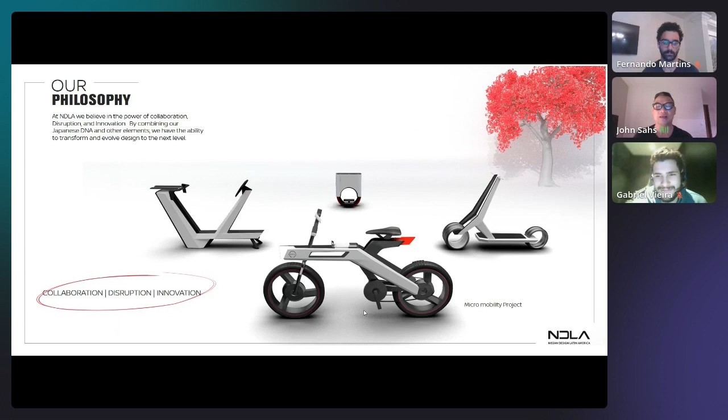And we felt it would be a great opportunity to take some of our electric battery technology and apply it into this micromobility solution where you can exchange the batteries between your bike, I think you call it the kickboard, your unicycle mobility, and also your training cycle in your house to share the same battery unit. So we had this idea trying to create an ecosystem that really evolves on electricity and sustainability. Next.

So I'm going to hand it over to Fernando to talk about this small project we did using Gravity Sketch. And I think why we really believe in this product is because during the pandemic situation in 2020, my team and I were separated because of the quarantine. So we had to use the current communication tools to communicate our meetings together, but it lacked that kind of, I would say, intrinsic connection that we have when we're working together in the studio.

And so when a few months ago, Gravity Sketch had reached out to us to try out the software, I was blown away and my team was blown away because the software allows you to simulate that intrinsic connection you have while working in the studio, meaning that we can be in this metaverse world, use Gravity Sketch to do our designs and do evaluation in real time and make the modifications in real time, which we don't have in, say, the current communication platforms we use to do meetings. Those are lacking that intrinsic value of being connected.

So Gravity Sketch definitely allowed us to be able to do this particular small project and have fun at the same time, really simulating the real world situation of working in the studio. So I'll leave it up to you, Fernando, to talk about this project that we did within, I would say, around 3 to 5 days.

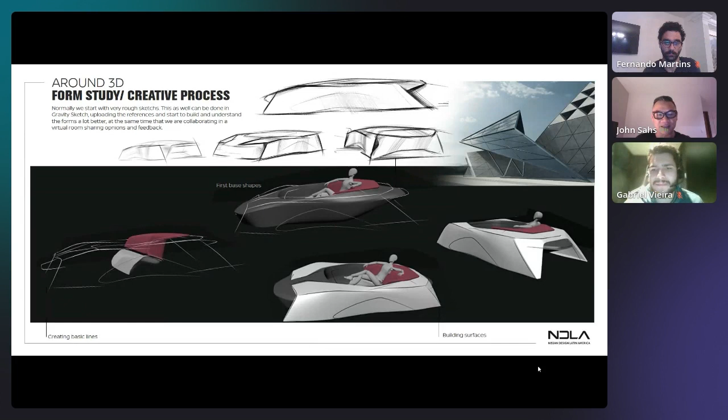So here's a project just showing Fernando's process of what he did. And can you go to the next slide, Fernando? Thank you. And this is the result.

So basically, from those initial ideas, he created the initial curves in Gravity Sketch, created the initial surfaces to capture his theme, and then put it in a kind of format to present the idea as a final solution or final presentation of this particular sculpture that he created.

Of course, he also used other tools to help render some areas of the form and doing some studies. And that's what I think is great about Gravity Sketch, that you can use other tools for presentation. For example, if you have to use some type of rendering software, it's very intuitive, very interactive with other tools.

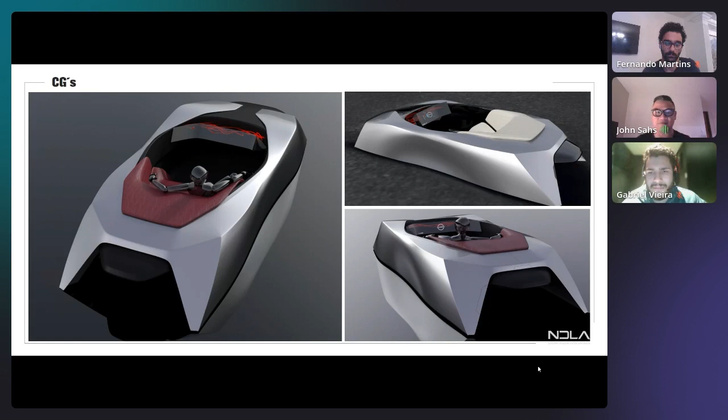This I find very interesting. Gravity Sketch has this kind of seamless integration that you can work with other tools in developing your ideas.

Here is kind of a quick study, again, with color materials, playing with colors and graphics. Something that we do normally in our industry when we create a car, we do variations of colors because color and materials are quite important in the process of designing a car.

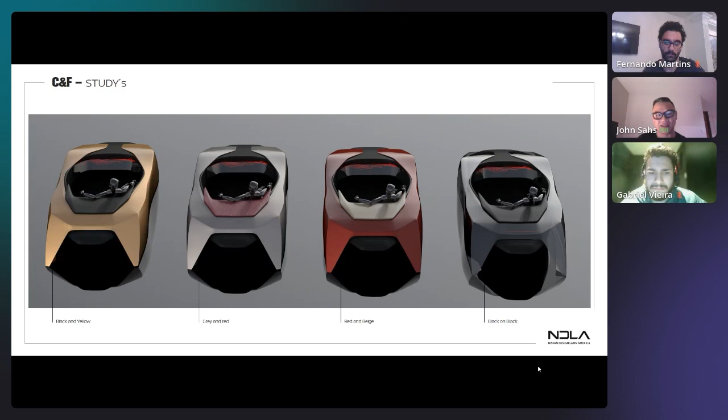So here we show you some solutions that we felt were kind of cool, and even the shape and the metallic finish going against the matte black gives this very cool and futuristic feel. Next. A little video just to show you the process, and I hope you enjoy it. Again, collaboration, disruption, and innovation are the three pillars that we work with at NDLA.

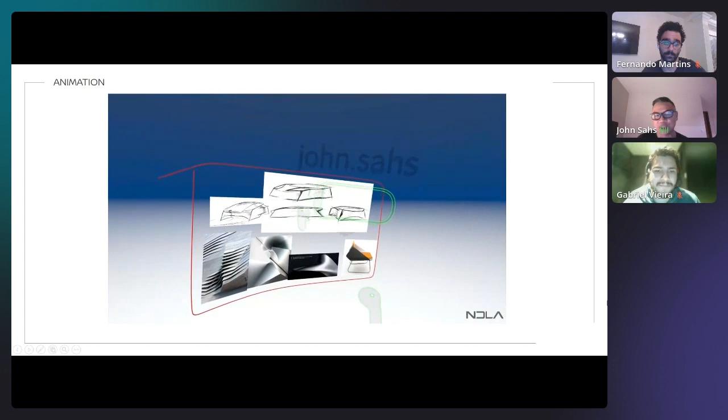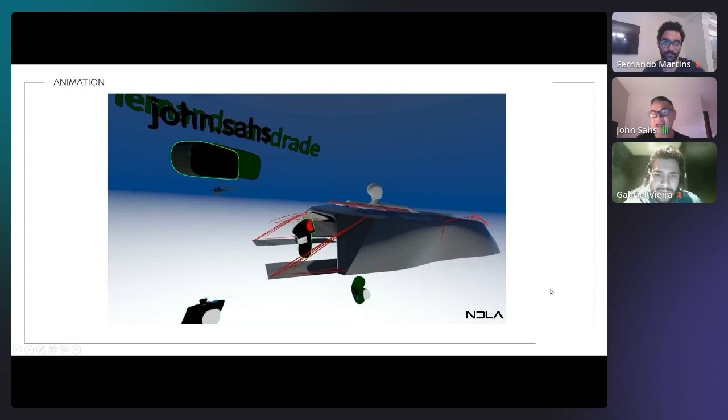And as you can see, Fernando creates the wall of his sketches, has some inspiration images, and we are there within this metaverse room, working in real time, refining the ideas together. This is something you can't get with any other software, working together in real time, and being able to develop the ideas quickly.

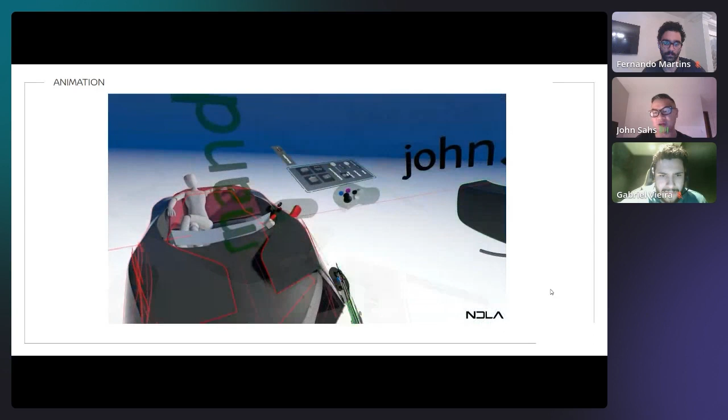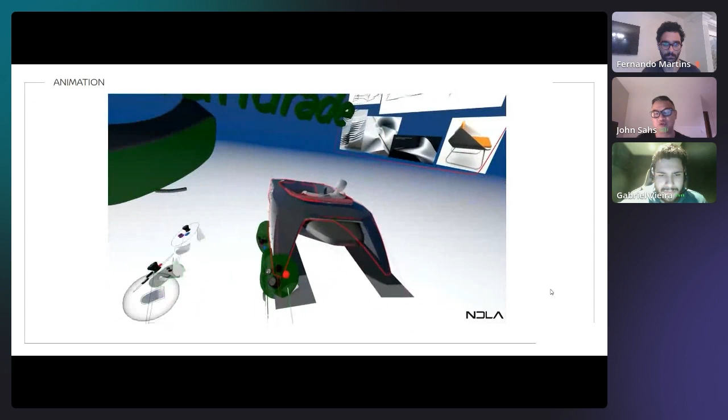Another thing I think about Gravity Sketch is how fast you can create your ideas and how fast you can make variations. This is a game changer, I feel, in the industry of design, where normally doing a lot of variation takes a lot of time. In Gravity Sketch, it's almost instant. And it was great collaborating on this quick project. And you can use a lot of the images from Gravity Sketch for presentation, as you see here.

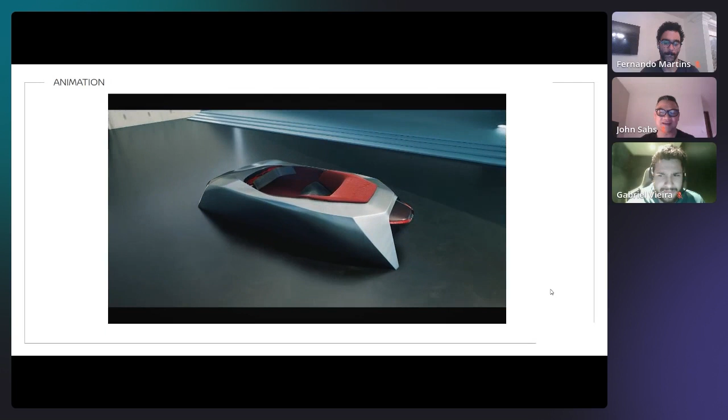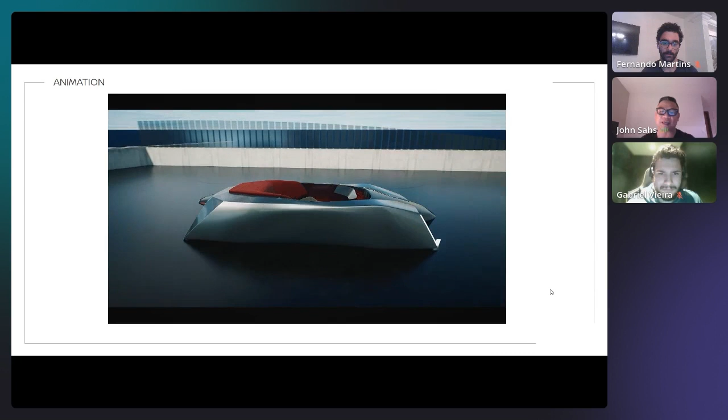Yeah. And then next, we gave it to the modeler, and he made this fantastic animation. Again, it was just using the model that was created in Gravity Sketch and putting it in an environment and doing an animation that really fits the image of the product. This very futuristic speed shape form. You can say it's an autonomous vehicle, but again, a fantastic tool for us to use. And it was a short project. I would say less than 5 days that we put this all together.

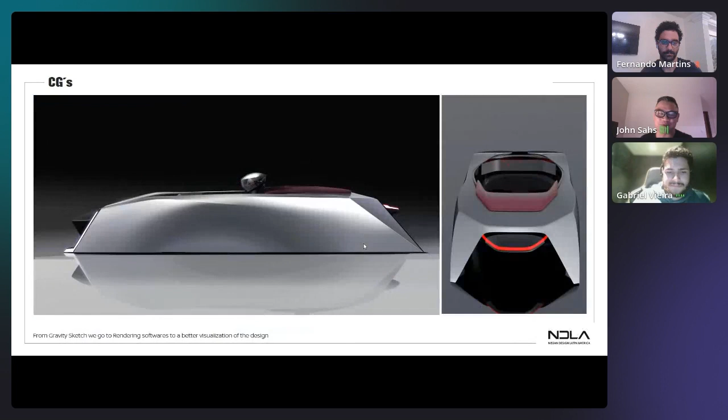And imagine if we were working on this for one month, we would make this project go even beyond what we had at the moment. But thank you for the time. Any questions? We're here to answer any of your questions. And thank you very much for your time for us to present our ideas and our process using Gravity Sketch.

Thank you so much, Fernando, John, and Gabriel. Yeah, it's truly amazing to see a project that you've done in 4 days be so complete. I'm wondering, you've already tested this workflow, right? And you're figuring out how to integrate it in what you do. How do you see this happening? How do you see the next steps for evolving your process?

Yeah, I think the next step for us is to be able to secure a room which is only for us, meaning that we have all the data and the design for us to be able to access. This is something we need to work on with you guys, so that we have all the IP, the design, everything secured, and we can really work on a real project. That's a next step in which we are working with your team to create this secure environment so that we can work on real projects. And once we do that, I feel we are able to use Gravity Sketch in our everyday work.

But what we wanted to show is not only to you guys, but also to our own industry, that this is possible. And we need this because we're still in the post-pandemic, right? So going back to work is not 100%. And having the ability to be mobile and to work together in Gravity Sketch is, as I said, a game changer. We're there working together, we're talking. In other platforms like Zoom, Meet, or Teams, you don't have that intrinsic connection. You don't walk around the model. Maybe you show an animation, maybe you show some sketches, but it doesn't have that perception that you're in the same room. So I think that's one of the benefits of Gravity Sketch, being in the same room.